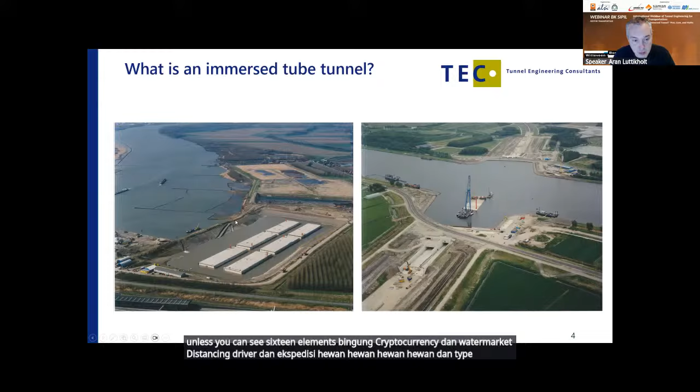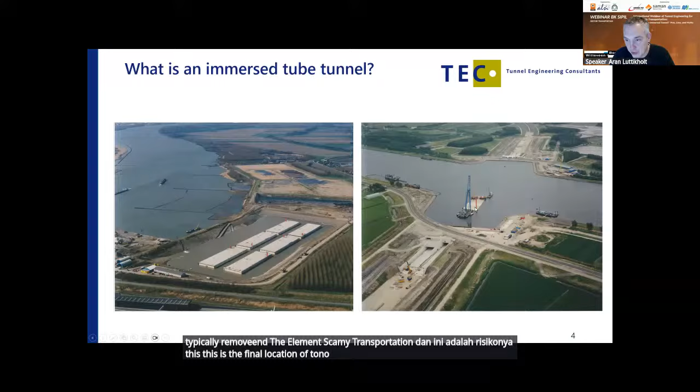So what is an immersed tube tunnel? On the left, you can see a casting basin. The idea is that the tunnel elements will be constructed somewhere else in the dry. On the left, you can see 6 tunnel elements being prefabricated. Once these tunnel elements are finished, the building dock or casting basin is flooded with water. That is what you see on this picture. Once the casting basin is entirely flooded, the dike will be removed and the elements can be transported out to the final location. That is what you see on the right side. This is the final location of the tunnel, and the 6 tunnel elements will be immersed on the bottom of the river. So that is the idea of an immersed tube tunnel.

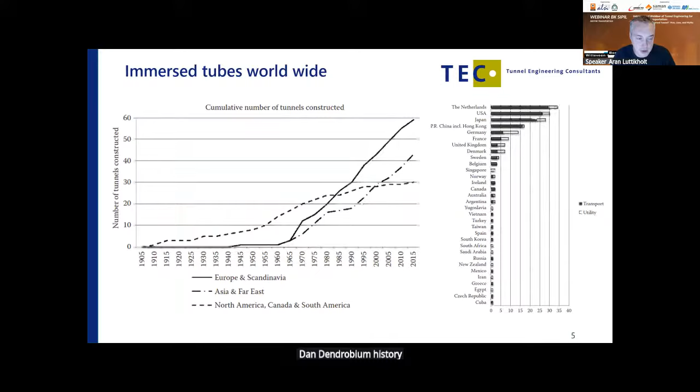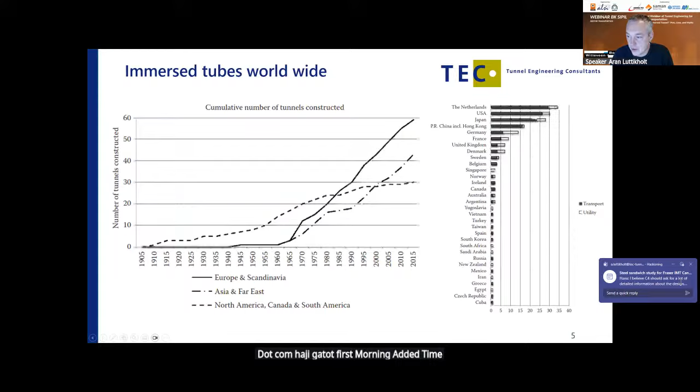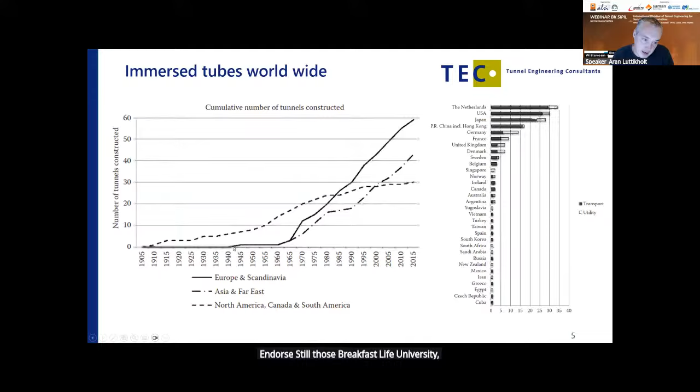In this graph, you can see the history of immersed tube tunneling. On the horizontal axis you see the timeline, and on the vertical axis, the number of tunnels constructed. More than 100 years ago, the first immersed tube tunnels were constructed in the United States. At that time, those were steel tunnels, filled with unreinforced concrete. 50 years later, the first immersed tube tunnels came to the Netherlands, and it developed into reinforced concrete immersed tube tunnels. So no steel tunnels anymore, just ordinary reinforced concrete.

In the Netherlands, we now have more than 30 immersed tube tunnels, but most of them have been constructed now. There will not be a lot of new ones. Most of the new tunnels are now being constructed in China and in Hong Kong.

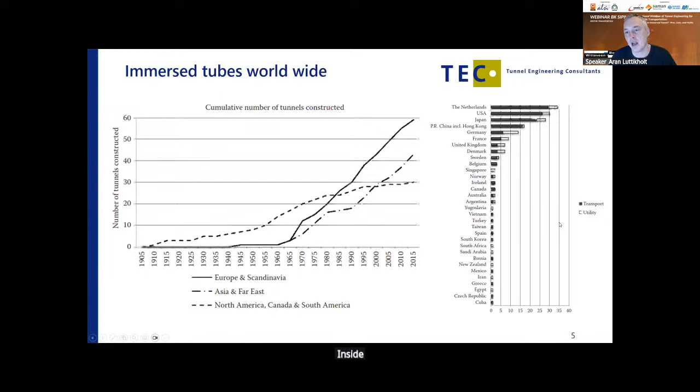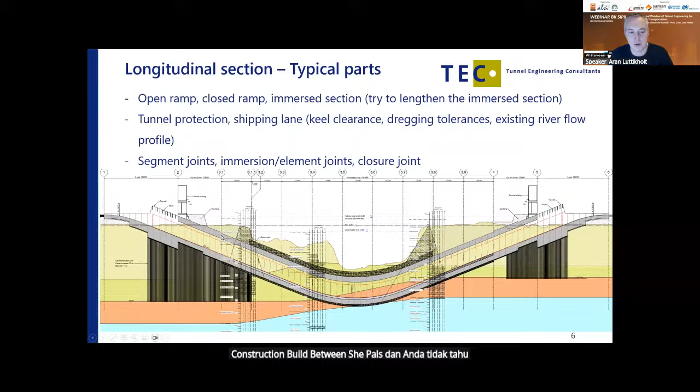Here you can see a longitudinal section of an immersed tube tunnel, and I will tell you some typical items. As with every tunnel, it starts with an open ramp structure on the left, so there is no roof yet. Then there will be a closed tunnel ramp section, which is not yet being immersed. It's just a construction built between sheet piles, excavated, and then you build the tunnel. It's a cut and cover tunnel. Then as soon as you go below the waterline of the river, you can use the immersed tunnel technique. So that's what you see here. You see 1, 2, 3, 4, 5, 6, 7, 8, 9 tunnel elements. They all will be immersed. And then there's a cut and cover section again, a closed section, and the open ramp.

The basic idea is that you stretch the immersed tube tunnel as far as possible into the land. You try to do the immersed technique as long as possible before you go into the cut and cover section, because it's actually very simple - the immersed tube tunnel you can put in wet conditions. So you excavate the river while it is in a wet condition. For the cut and cover sections, you need to excavate in the dry, and that's much more expensive than just producing in the wet.

The tunnel always goes below the riverbed, just below the riverbed - you don't need to go much lower. You often see a tunnel protection on top of the tunnel, to protect the tunnel from the river current and from any falling anchors. You need to take care of the shipping lane, that's usually the deepest part of the river. There you need to take care of the keel clearance, the dredging tolerances.

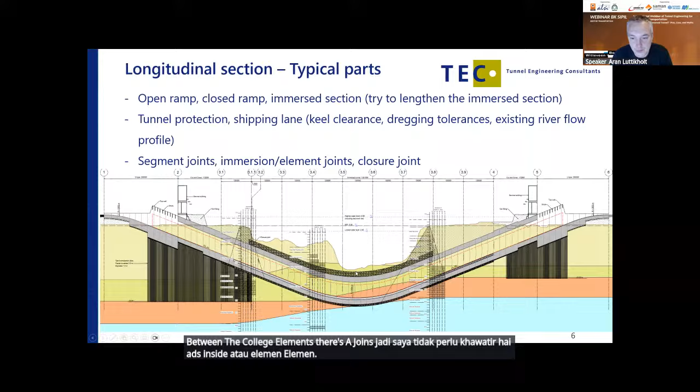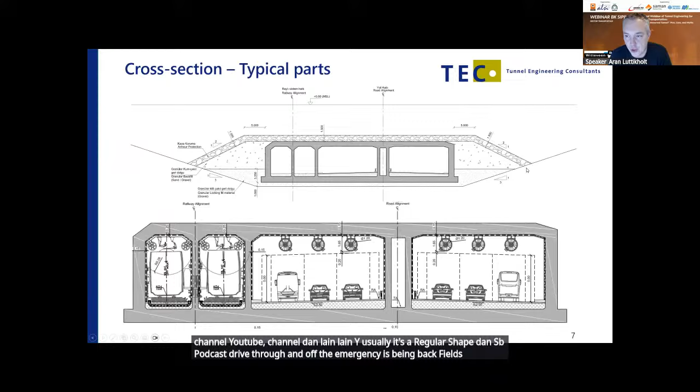So what is the main reason why you should choose a bridge or a tunnel? Well, that is the shipping traffic. If you have very large ships coming in, and large ships usually come in when you're close to sea, when there's a big international harbor, then ships are big, and once ships are big, you need a very high bridge. This bridge can be 40, 50, or even 70 meters high.

And once the bridge is so high, you need very long approach bridges because you can only go down by 5%. You end up with a very long structure, taking a lot of land at the shore sections, and the structure becomes very expensive because it's so long. If you compare that to the immersed tube tunnel, that structure can be much shorter because it's just below the riverbed and ends as soon as the shore starts. So the structure is shorter and therefore cheaper.

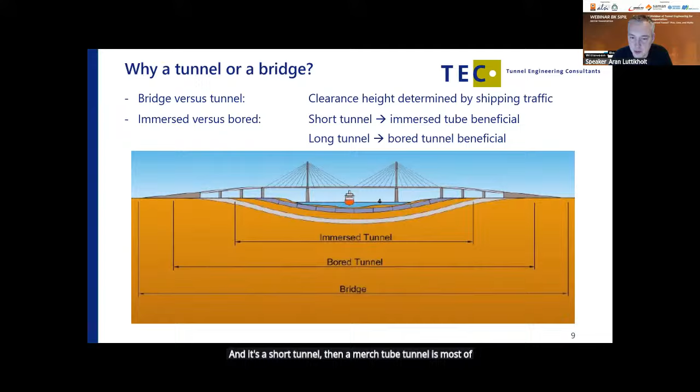Furthermore, the pillars of the cable-stayed bridge can interfere with the obstacle limitation zone of an airport. So if you are close to the runway of an airport, these pillars are not allowed. We know a lot of situations where a bridge has been replaced by a tunnel because of an airport close by.

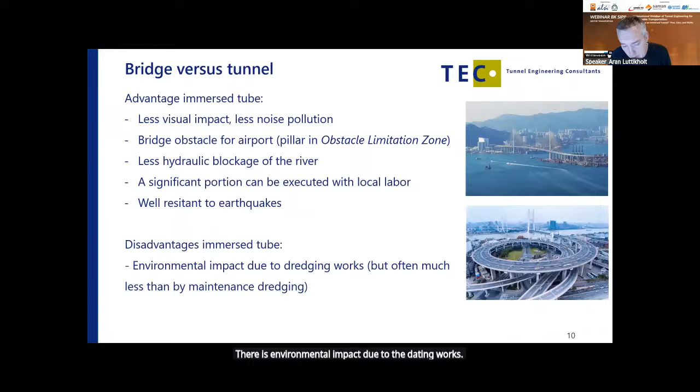There are also disadvantages of an immersed tube tunnel. There is environmental impact due to the dredging works, but whenever there is maintenance dredging in a canal or river, you also have environmental impact. So you need to take care of these environmental issues during design, and most of the time you can take measures.

If you compare immersed tubes to bored tunnels, the first thing that's different is the shape of the cross-section. The immersed tube is rectangular, and it can much better accommodate the traffic envelope. If you have a circular bored tunnel, there is additional space on top and below which will not be used. So the rectangular shape is more economical.

Considering construction planning, a TBM tunnel, a bored tunnel, always requires you to first make a very deep start, a cut and cover section, the ramp section. From that ramp section, you start drilling with your TBM, and only after the final section of the TBM has been finished can you finalize your tunnel. So it's all construction after each other.

The immersed tube tunnel allows parallel construction. You can start making your tunnel elements in a casting basin while at the same time making your cut and cover sections. So we have parallel construction, and therefore an immersed tube tunnel can be constructed in a shorter time span.

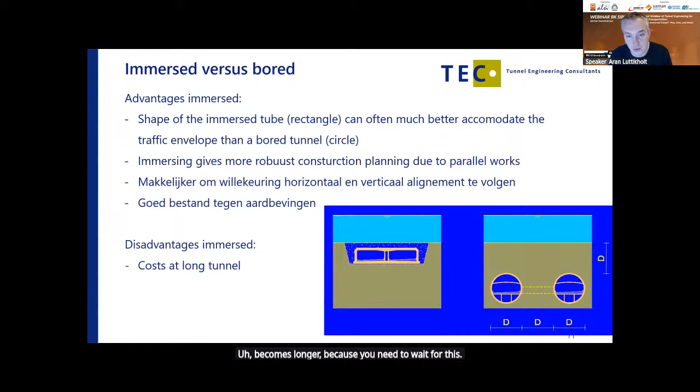So my question is, why is there an immersed tube tunnel at this section? Actually it's at two sections - here is an immersed tube, and there is an immersed tube. When you first look at this picture, a shallow bridge is the cheapest option, so that's why most of the connection is built with a bridge.

But behind this crossing there is the largest military or naval base of the United States, with a lot of marine equipment. The United States military said, we want free access to the sea, and we don't want a bridge when we go to sea, because a bridge can be very fragile. If the bridge gets bombed, our passage to the sea is blocked, and we don't want that. So it's just because of the naval base behind this crossing that there are two immersed tube crossings.

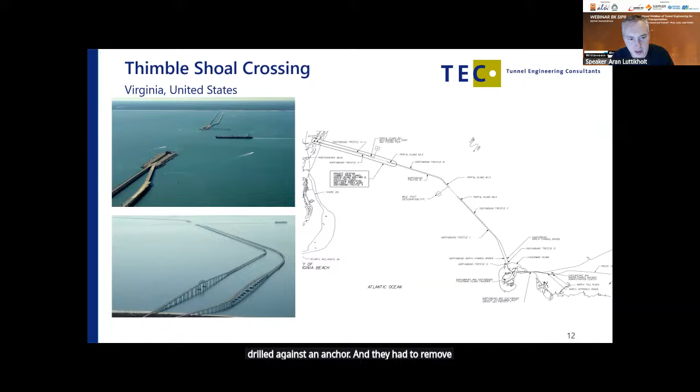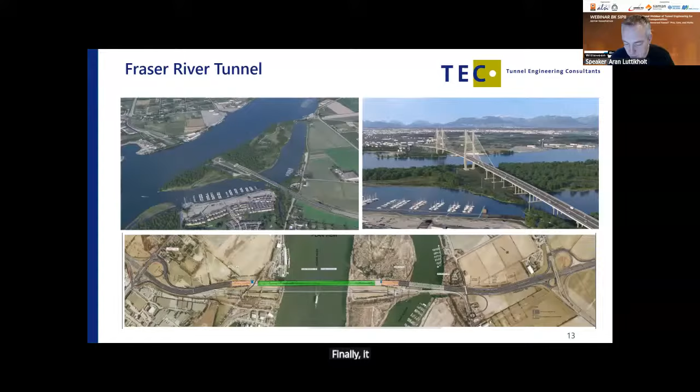This is a tunnel currently being constructed in Canada, in Vancouver, next to the old George Massey tunnel. There will be a new tunnel, the Fraser River tunnel. On the left you see a picture of a tunnel, and on the right a bridge. So why did they finally choose a tunnel? The tunnel is only slightly cheaper, so that's one reason. But the government said the bridge has too much visual impact, too much noise, and the lighting of the bridge also has too much impact. The approach bridge would have too much impact too. It's very close, and it's also politics when one wants a tunnel or a bridge. Finally, it has been decided to do a tunnel.

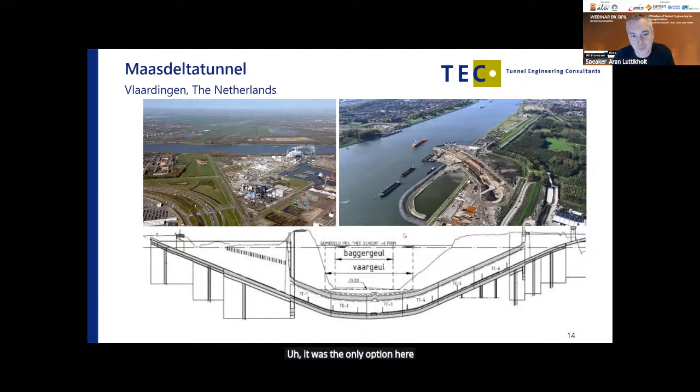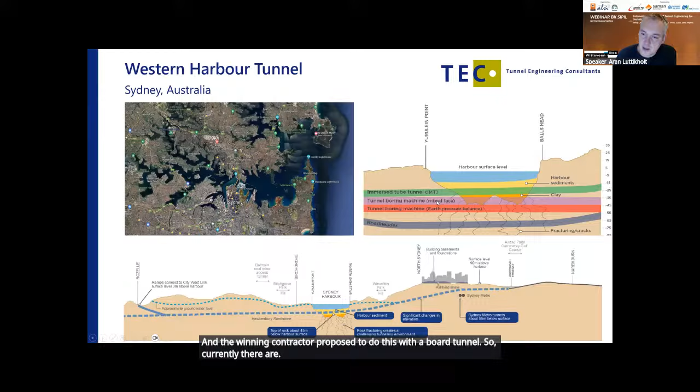In the end, designs were made for an immersed tube and a TBM tunnel, and the winning contractor proposed to do this with a bored tunnel. So currently they are drilling this section. I hope this gave some ideas on when to choose a bridge and when to choose a tunnel. Now I will tell some about the structural design of an immersed tube tunnel.

Once you go into deeper rivers, or have more traffic lanes in your tunnel, the forces on the roof and the floor become larger, and then sometimes you need to add transverse post-tensioning. Then the structure becomes a little bit more complex. A few of these tunnels have been constructed like this.

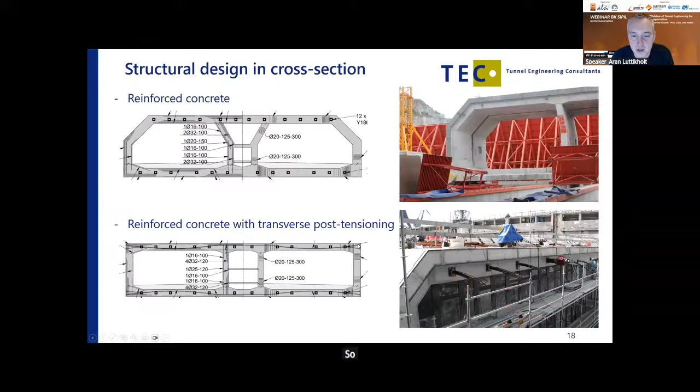And then in China and Japan, they are making... what's that? Is that me? Yes, you can continue. What's the noise? It is not me. Yes, maybe someone. Okay, yeah, okay, you can continue.

No problem. So in China and Japan, they are making steel tunnels as well, and that can be used when you go very deep or when the tunnel becomes very wide. Then the forces become too large to take with reinforced concrete, so you go to steel sandwich tunnels, made of steel. The inside and outside are steel plates connected with steel webs, filled with self-compacting unreinforced concrete. They can take higher forces than reinforced concrete.

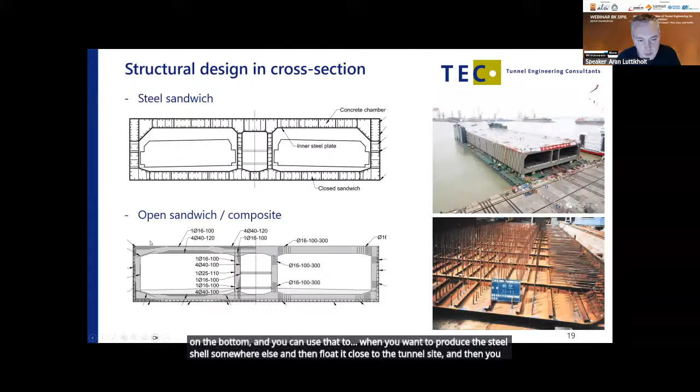And then you have a combination of reinforced concrete and steel, shown at the bottom. You can use that when you want to produce the steel shell somewhere else, float it close to the tunnel site, and then finish it with reinforced concrete. But that has not been used a lot.

There is a shear key in between to transfer the shear forces. Because the reinforcement is not continuous, rotations can occur, which can be very beneficial in soft soils. The tunnel elements can closely follow the settlements of the soil without high forces coming into the structure, as it's all accommodated in the joints. Most tunnels have been constructed as segmented tunnels.

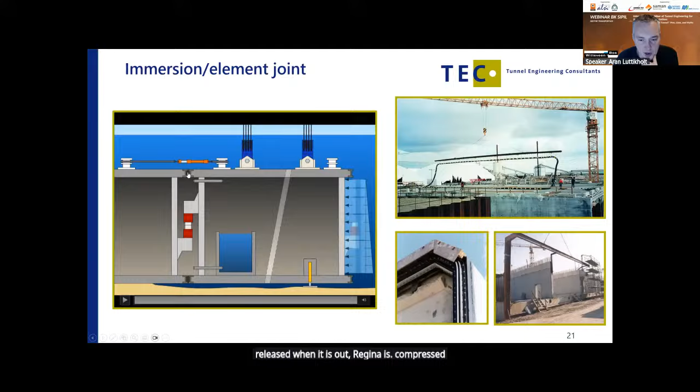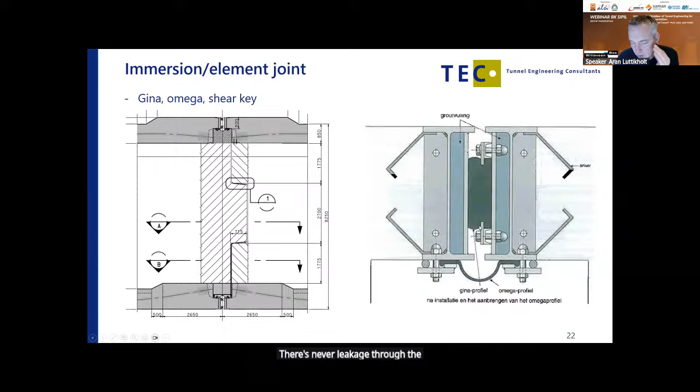On the right side, you see a detail of the compressed GINA. But after immersion, when you finish the tunnel from the inside, you place a secondary water stop, the omega profile, shaped like an omega. That is just a secondary water barrier, to be sure that in case the GINA starts to leak, there is a second water barrier stopping the water. But from all the tunnels we've seen in the past, there's never leakage through the GINA profile. It is compressed so much that there is no leakage.

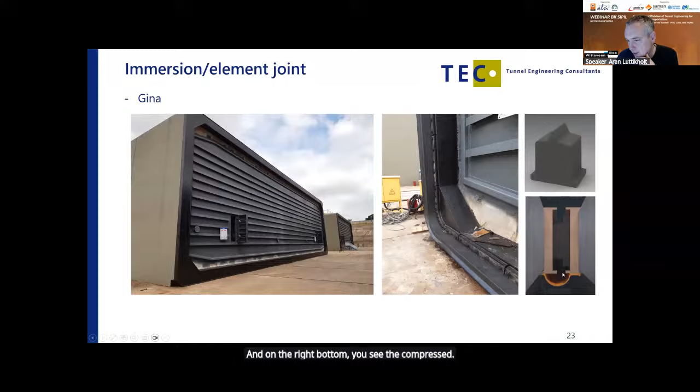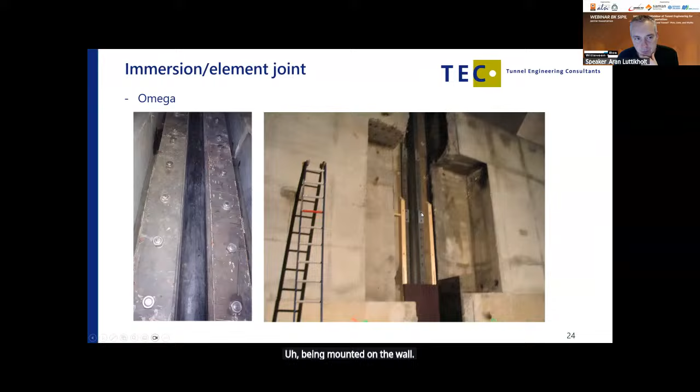The immersion joint's GINA profile ensures water tightness at the immersion joint. At the segment joint, we have other water stops. On the right top you can see a water stop, poured into the concrete between two casts to make sure there is no water leakage at the segment joints. On the outside, there's another rubber profile that makes sure no sand will go into the joint, because when the tunnel cools in winter, the elements become a little shorter, a gap exists in the joint, and sand is able to go in. But by putting a rubber profile there, sand is not able to come into the joint.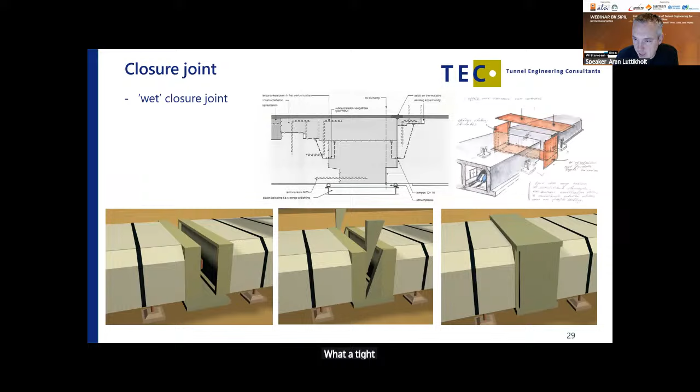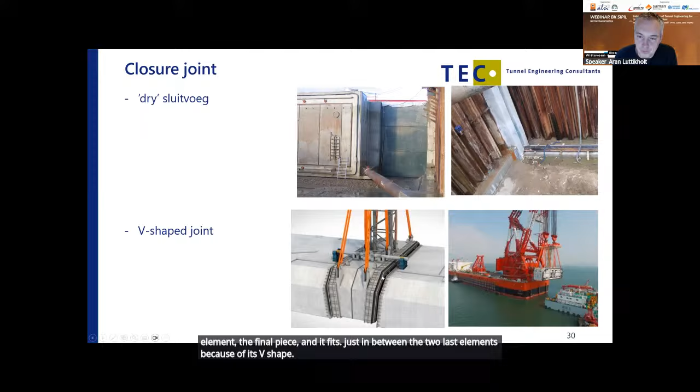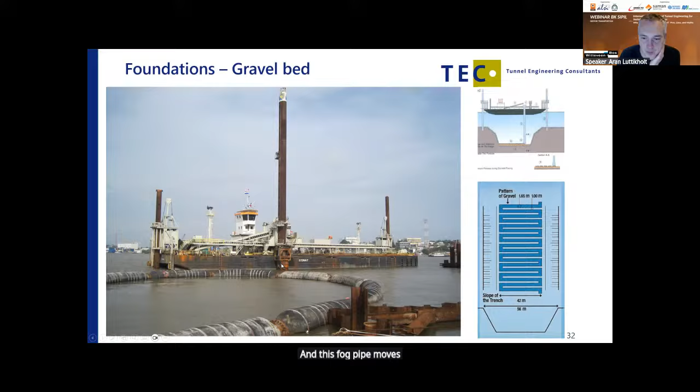Another option is to put a gravel bed before installing the tunnel elements, and then put the tunnel element on top of this gravel bed. Here you can see a pontoon with a fall pipe, and this fall pipe moves over the bottom, producing the gravel bed. Here you can see it in a schematic picture - it's a bit different, a jack-up system with a fall pipe, and this fall pipe is grading over the bottom to prepare the foundation for the tunnel.

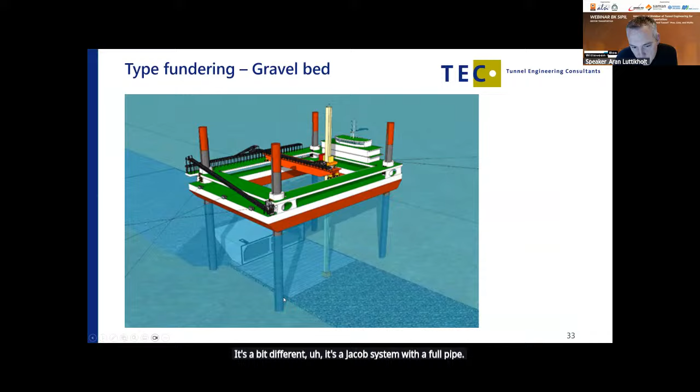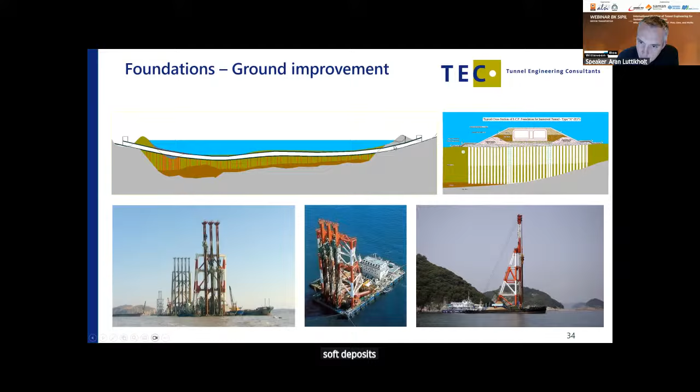Sometimes ground improvement is required. I told you immersed tube tunnels can be used in very soft soil conditions, so why do you need soil improvement? Well, you don't need it because the soil is weak, you need it when you have differences in soil conditions. Here you can see the gray part is rock material with soft deposits in the river. Once there is a transition from rock conditions to soft conditions, you need to smoothen the transition, and you do that with soil improvement. Only at the regions where you transit between two different soil systems do you need soil improvement, using stone columns, cement deep mixing, or sand compaction piles.

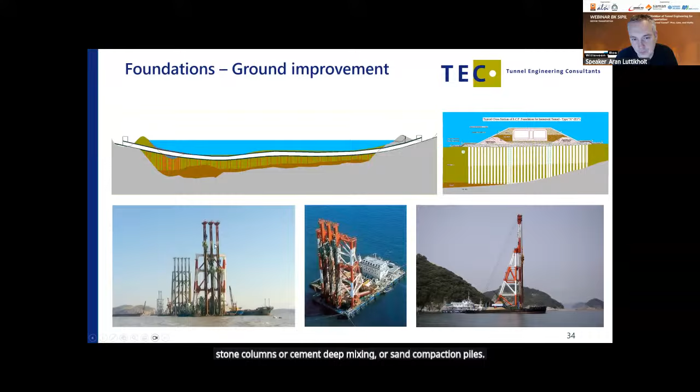This is a longitudinal view of the Sydney Harbour Tunnel design. The orange line is the top of the brown line, which is the top of the sandstone. The tunnel is founded in sandstone for the greater part, but at the right side there are soft deposits. Both are fine, but you need soil improvement at the location where you transit from the sandstone to the soft deposits.

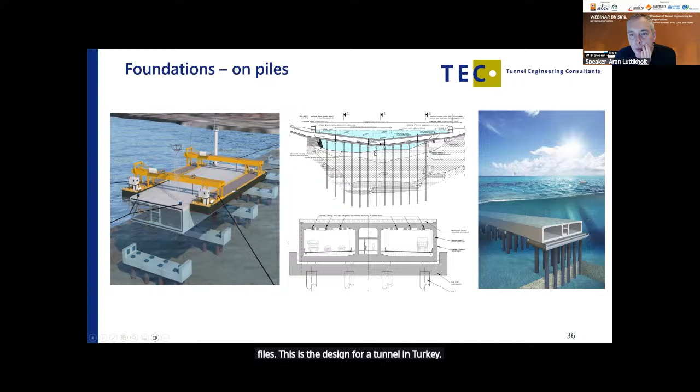This is a more exotic option: you can put your tunnel on piles. This is the design for a tunnel in Turkey. When you put the tunnel on piles, it can be much shallower and therefore shorter and cheaper. But of course it blocks the river flow a lot, so it cannot be used in rivers where there is a lot of water flow.

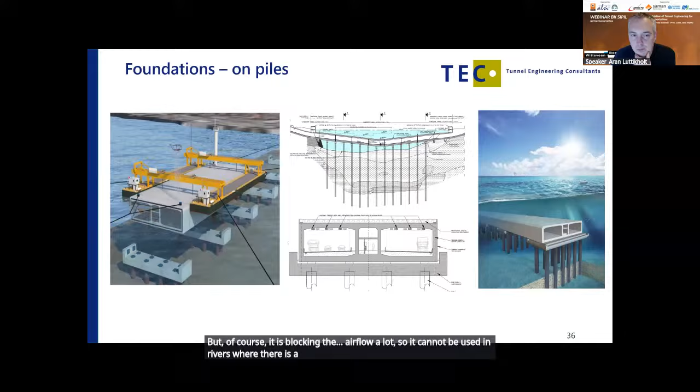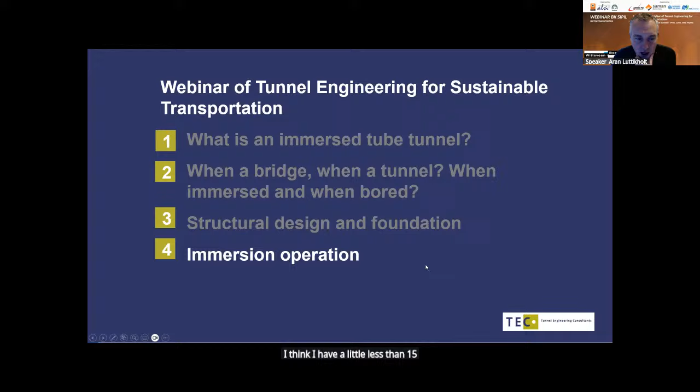I think I have a little less than 15 minutes. In this time I want to show you the immersion operation, how these tunnel elements need to be placed on the riverbed, and what is required for that operation.

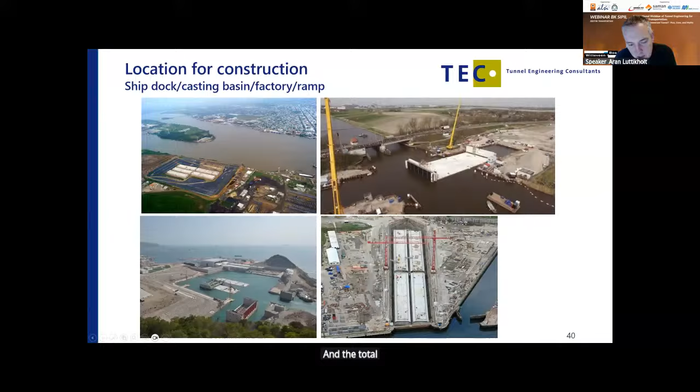In Denmark they also have a factory. This is a picture from about a year ago, where five production lines are producing 90 tunnel elements for the 18-kilometer-long Fehmarnbelt tunnel.

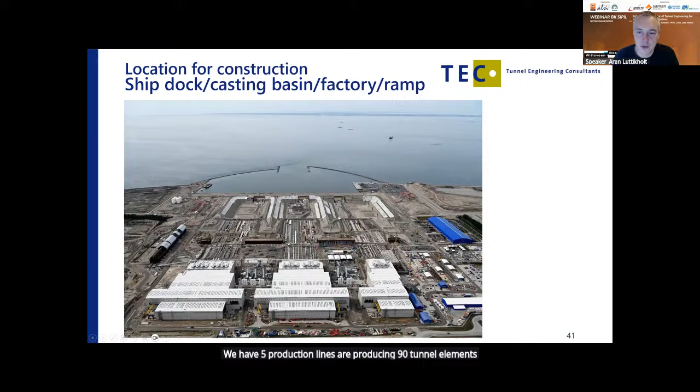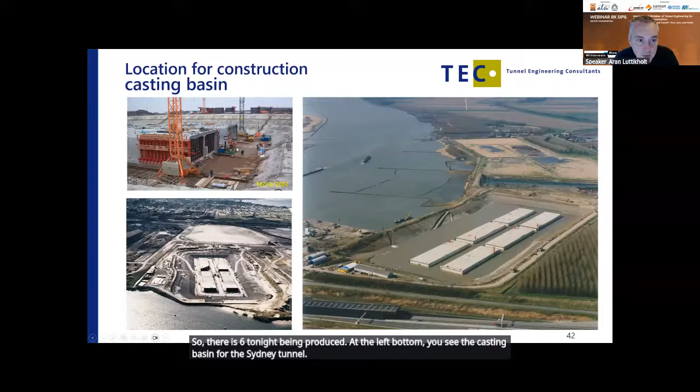Here on the right side you see the casting basin in the Netherlands, where six tunnel elements are being produced. At the left bottom you see the casting basin for the Sydney tunnel, and the left top, I don't remember which one it is. Here you see a situation where the tunnel element is being produced at the ramp sections.

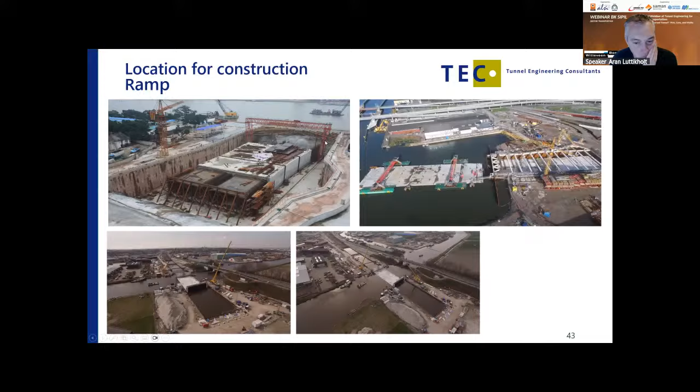Another option is to make the tunnel elements at the factory at the quay wall and then push it onto a semi-sub. And here you see examples of a tunnel element being cast in a dry dock.

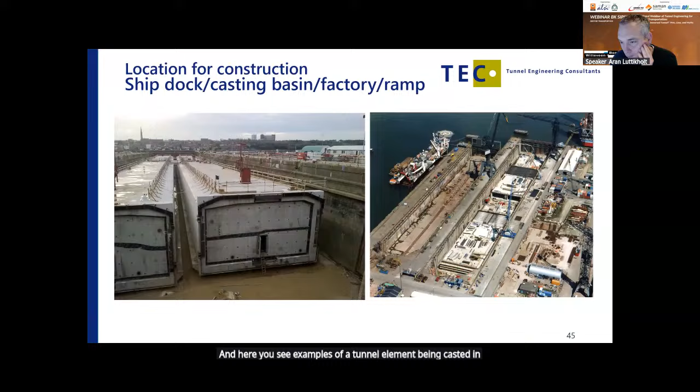When you have finished your tunnel elements in the casting basin, you need to close the ends of the tunnel, or otherwise water would come in. That can be done with concrete bulkheads, which you see on the left, or with steel bulkheads, which you see on the right.

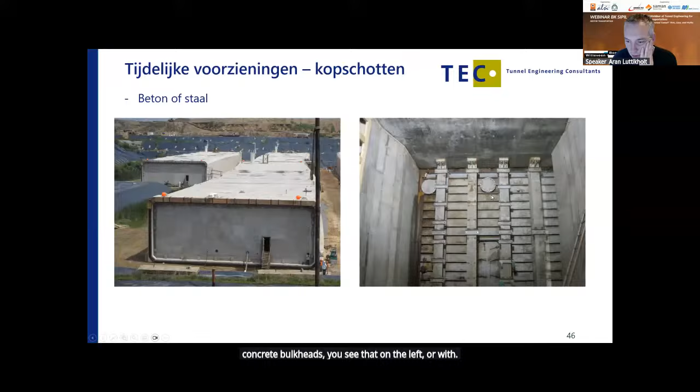Longitudinal pre-stress is required to transport the tunnel elements.

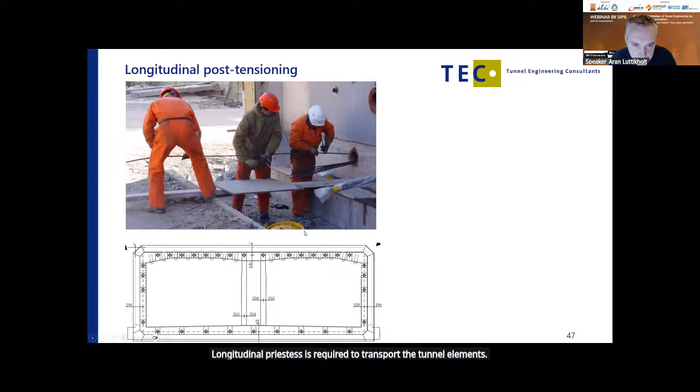Inside of the tunnel, there are ballast tanks. You need those ballast tanks during immersion, so water is pumped into these ballast tanks inside of the tunnel element. Once water goes in, the element becomes more heavy, and then it moves down to the bottom of the river.

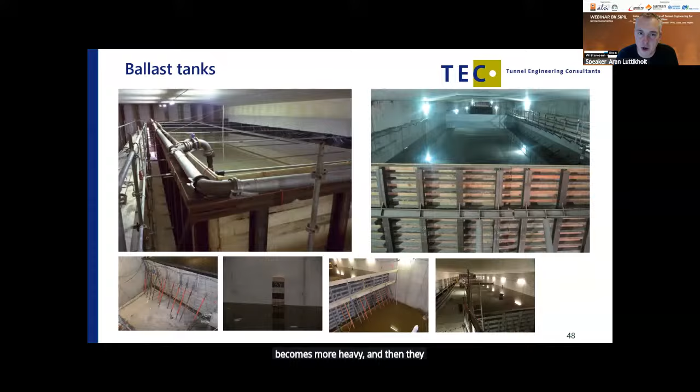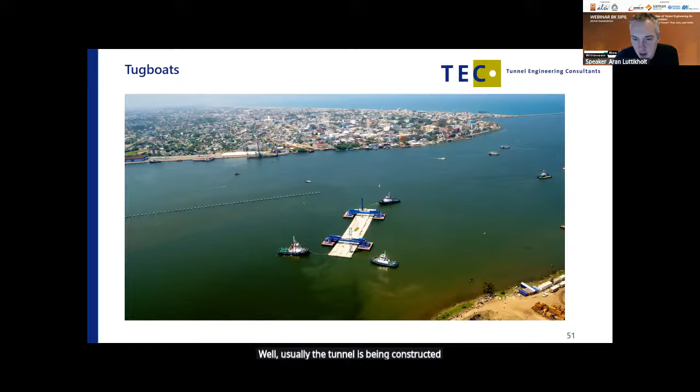Tugboats are required to tug the element from the casting basin to the final location. Usually the tunnel is being constructed in a port area, and in a port area tugboats are always present, so that's not a problem. Here you can see tugboats again.

A pontoon is used to control the vertical position of the tunnel element. So we have lifting lugs here, and these lifting lugs are connected to the catamaran, and they control the vertical position.

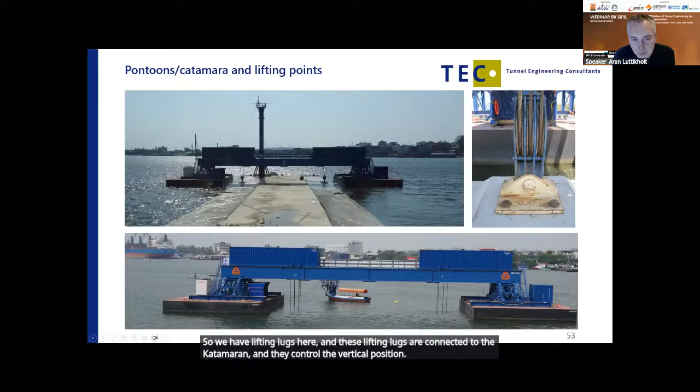When you are using a sand flow foundation, you need to put the tunnel element on a temporary support. You can see here it's a kind of jack coming out of the bottom of a tunnel element, and they are supported on a concrete plate on the bottom of the river. On the other side, the tunnel element is connected to the previous tunnel element. That is the temporary support.

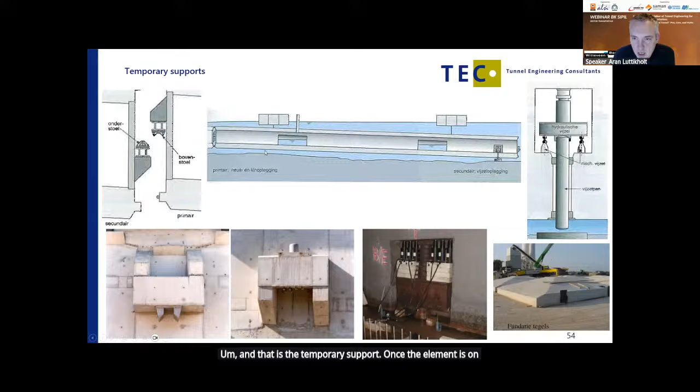Once the element is in the right position, the area between the trench bottom and the tunnel element is filled with sand by sand flowing.

To make sure that the tunnel is correctly positioned to the previous element, there is a pen, and this pen will be caught by the catch. You can see a V shape, and this pen moves into this V shape while you go down with the element, and then it will make sure that a tolerance of 2.5 centimeters occurs. So the tunnel element can be positioned within 2.5 centimeters.

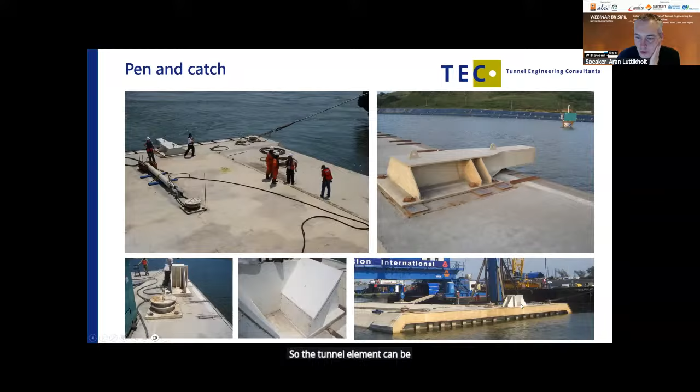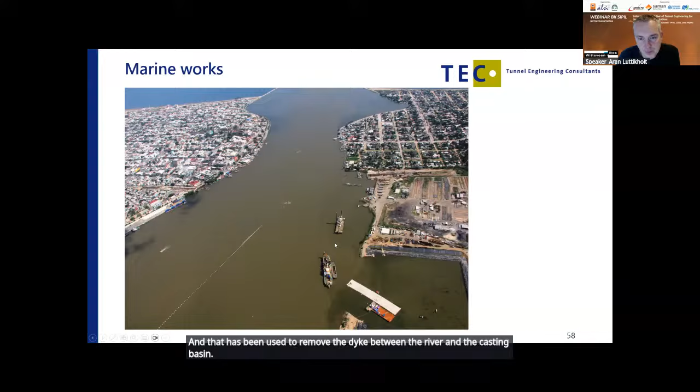So that is my presentation. I want to thank you, and I give it back to you.

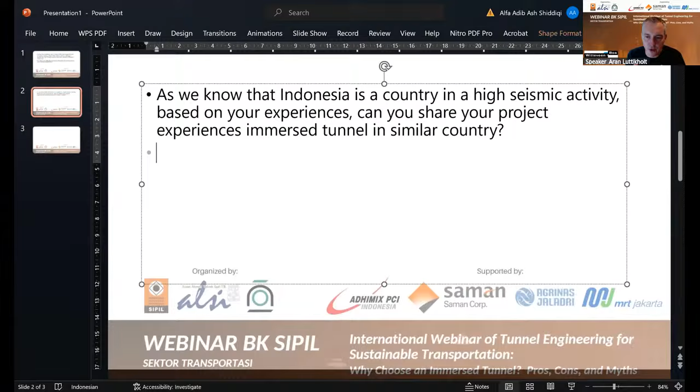Typically, we use sheet piles, and inside those sheet piles we make the construction pit and the cut and cover sections. Once the tunnel is connected, I think we have two rows of sheet piles because it needs to connect to the immersed tunnel elements. There we have some kind of special facing in the construction pit, but that's the only thing which is different compared to a usual construction pit for a cut and cover tunnel. Whenever I do a new presentation, I will put a picture in it on how this cut and cover section transits to the immersed tunnel section.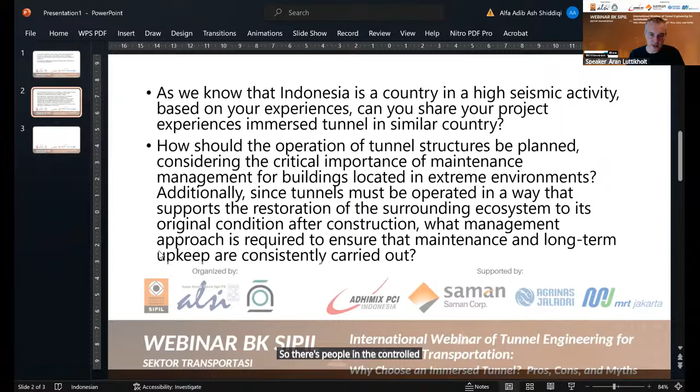Compared to bridge maintenance, how difficult or expensive is immersed tunnel maintenance? I think the maintenance is cheaper, but you have more operations. There's people in the control building watching the traffic in the tunnel, so that's more than in a bridge. But the tunnel itself, the concrete, is less maintenance than when you have steel being attacked by the weather.

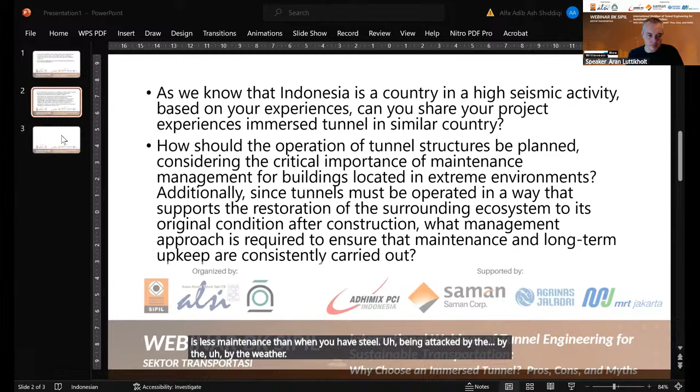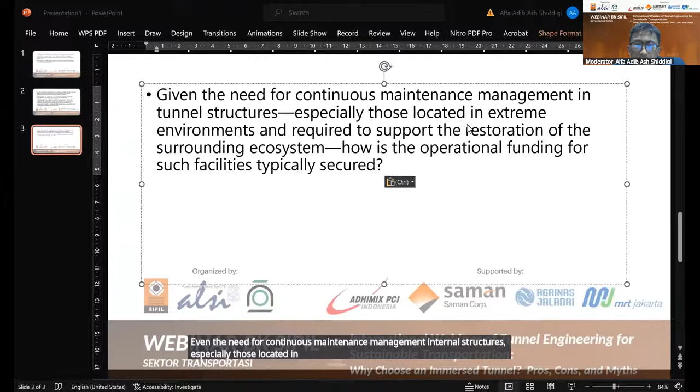Okay, next we have a question in the chat box. Given the need for continuous maintenance management in tunnel structures, especially those located in extreme environments, how is the operational funding for such facilities typically secured? Is it by financing like a toll road, or how is the funding for maintenance and operation typically arranged?

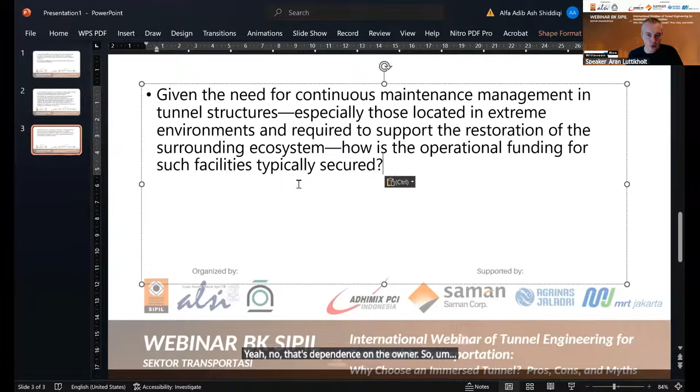Yeah, that's dependent on the owner. In Indonesia, I don't know who will be the owner. It will be the government, so they need to make sure to put it in their budget. I think it is being controlled by the road authority.

How expensive is the maintenance compared to the initial cost of constructing the tunnels? Is it 10% per year or 1% per year? I don't know.

Okay, do we still have any question from the audience? Pak Rian or from Saman? Okay, maybe one question for me.

In terms of sustainability again, especially during construction or over the operational lifetime, do you know any emerging material or method that can further reduce environmental impact? For example, in bored segmental tunnels, we currently explore concrete without rebar using fiber concrete. Is there any technology you can see being applicable in the future, especially considering carbon impact and so on? Maybe you can share it with us.

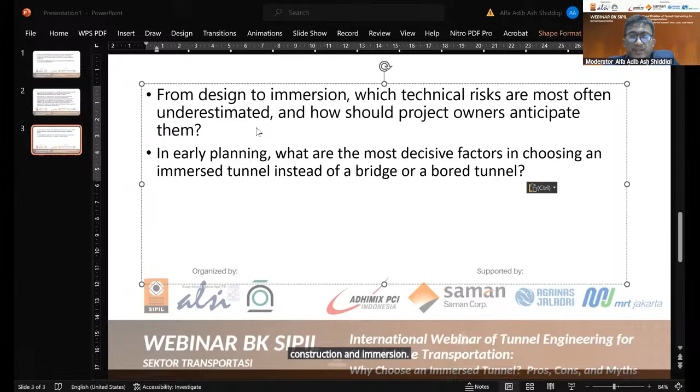Okay, we have a question: from design to immersion process, which technical risks are most often underestimated, and how should project owners anticipate them? The risks from design to construction and immersion—what is the risk that is most underestimated? Yeah, I think it's the soil conditions. Most of the time soil investigations come in very late, and then when you're almost finished with your design, new soil information comes in. So I think it's always wise to do as much soil investigation as you can, as soon as possible.

Okay, do we still have any question? Okay, because it's already the time. Well, since the time is up, now I move to closing.